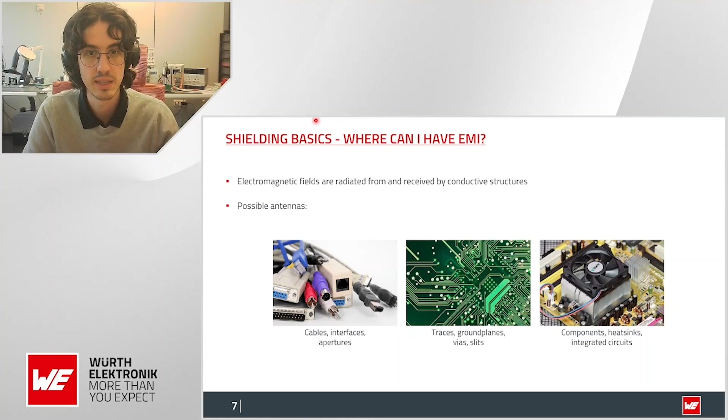Also, these electromagnetic fields are radiated by anything metallic that has a current going through it. That means anything can be an antenna, including cables, input-output interfaces, and apertures, for example from the frame and the cover of your application. Also in the PCB, we have traces and ground planes that can be good antennas that could provoke electromagnetic fields. And also some passive components, like, for example, a heatsink in this case.

We know that on the market there are several types of shielding materials, and all of them have different properties and are made in different ways. So the best way to compare them is with the shielding effectiveness, which is a quantitative property that gives you the value of how much the material is attenuating, or removing, the field in the environment.

This is a really simple measurement, because what is being measured is the environment without the shielding material, and then you just place the material in the middle, as you can see here. Then you subtract one value from the other, so you get the shielding effectiveness.

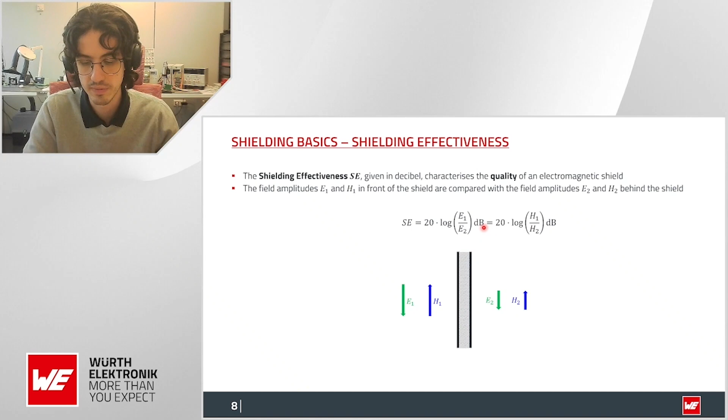Then some rules of thumb that will help you identify which type of shielding material you need to use: for example, if you want to shield your device from an electric field, then you need to use a low impedance material. In this case, it can be, for example, a copper tape or an aluminum tape, because what you want to have is a high conductivity material.

And if it is the other way around, that you want to shield your application from a magnetic field, in this case you need to use a high permeability material, for example a ferrite sheet. Another rule of thumb is that normally, if you want to attenuate a magnetic field, the thicker the material, the more it will attenuate, especially speaking about ferrite sheets.

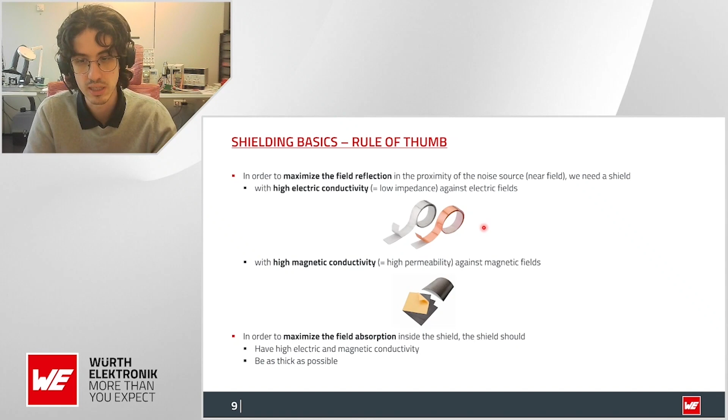And now jumping directly to some tips here that probably will be quite useful for you. For example, EMC gaskets: where can they be found, where can you use them, or where can you see them? In the end, EMC gaskets can be found everywhere. If you have an enclosure, then probably you're going to have a gasket there.

So as you can see here, for example, on this device with a heatsink and everything, we have an enclosure. As you can see here, we have the gap for the ventilator. Also, we have one for the input-output interfaces. Then we also have one here for the LCD screen or the touch screen. So in all of those places, a gasket must be used.

Also, some other applications can be when we have a cable and we want to have a good grounding connection to the enclosure. Then we can have a gasket that can be cut or customized to the shape of the connectors. And then we ensure that we have a good connection, a good grounding connection in this case.

And another really common application is with all the EMC chambers that you have probably already visited. If you check out the frames of the enclosure, you can see some metallic gaskets over them, just to ensure that the door of the EMC chamber is well connected to the frame, or to the chassis in this case.

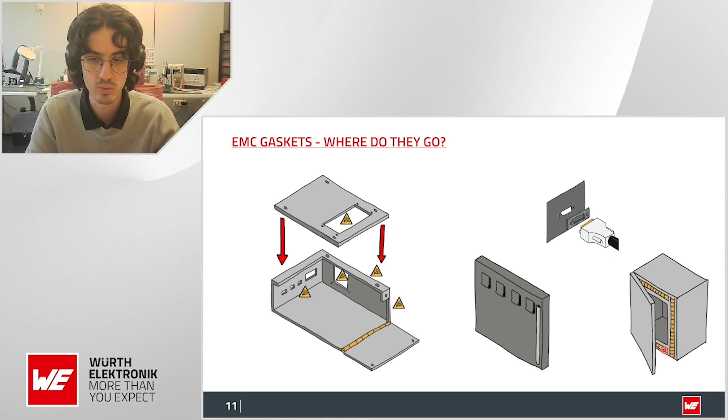Then about why gaskets are needed, that will probably be one of the questions you have in your mind now. In the end, gaskets are needed just to fill gaps. Because whenever we have our cover and our enclosure, even if we think that the surface is super smooth without any kind of discontinuity, or is super soft to the touch, if you take a microscope and zoom in, you will always find these kinds of discontinuities.

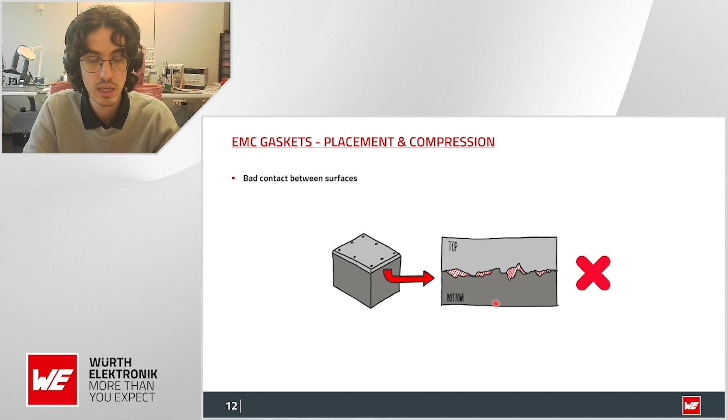And these discontinuities could provoke an electromagnetic field here, because in the end you will have a conductive surface here, another one here, and a current can go through it. And at the same time, the noise can go outside through it. So what you want to use in this case is an EMC gasket, mainly just to fill the gaps. And if you fill the gaps, then you are 100% sure that you are creating your perfect Faraday box, which is in the end the main purpose of your enclosure.

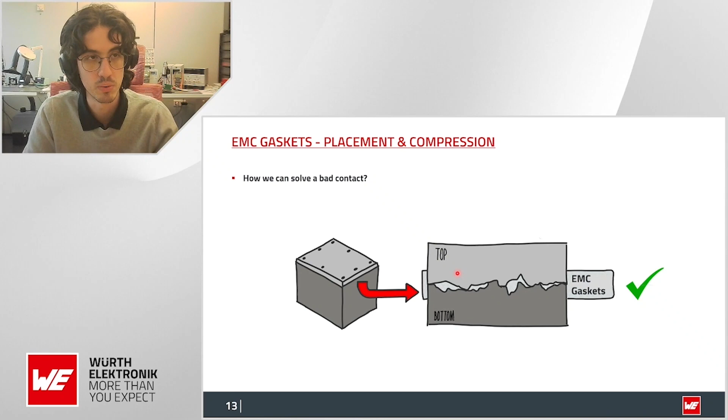Then, in order to use an EMC gasket correctly, there is actually a general rule of thumb for all mechanical shielding or grounding materials, which is that in order to achieve the best conductivity value, and at the same time not overstress the material from a mechanical point of view, the best thing is to compress the material around 20 or 30%. That's a general rule of thumb.

And what you are achieving in this case, for example, is the case of the conductive fabric over foam gaskets, which are normally produced with a non-conductive adhesive tape on the bottom. So if you compress them at 20%, you will achieve the best value of conductivity, and at the same time you will make the conductive fabric overlap the non-conductive adhesive, ensuring that you have a good connection between the top face and the bottom face.

Then another extra tip to place them correctly in your enclosure: the best way will be to create a groove along the inside surface, or the inside side, sorry. And the best thing will be to create a groove with a depth of around 80% of the total height of the gasket. So say, okay, I need to use a gasket that is 10 millimeters in height. Then in this case the groove is going to have a depth of 8 millimeters. So I'm 100% sure that the 20%, so about 2 millimeters, will be on the outside.

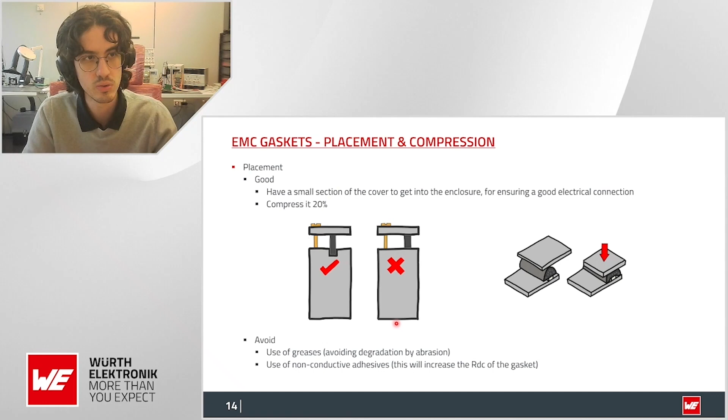And then also the groove is quite important, so the gasket doesn't slip out from it. So then you know that it is fixed in the same place. At the same time, another important tip is to not use any kind of grease or lubricant in this case, just to make the compression of the gasket not scrape the walls or not get stuck. Because then what you are provoking is that you are adding a liquid or something that is not controlled to the environment of the gasket, and that could provoke some corrosion.

Another important thing to have in our mindset when we are using EMC gaskets in our enclosure is material matching. I always like to think about it like finding the perfect partner. Because if you don't find a good match for your material, or for your couple, then you will have problems in the long run. Which, speaking about materials, will provoke oxidation layers all over the place.

So that means that, for example, if my frame is made of aluminum, then the best thing would be to choose a gasket made of aluminum. Or in the worst case scenario, choose something that is made of zinc, cadmium, steel, or magnesium. Because some common problems that mechanical designers or engineers face many times is that they make the chassis of aluminum because it is cheap, it is light, and it doesn't add too much value to the mix. And then they use conductive fabric gaskets, which are made of nickel copper wires.

So that means they are using aluminum and making contact with nickel, meaning that in 1 or 2 years, depending on the environmental conditions, they face oxidation layers over it. So that's a big issue and also a common one that can be solved just by using an aluminum gasket in this case.

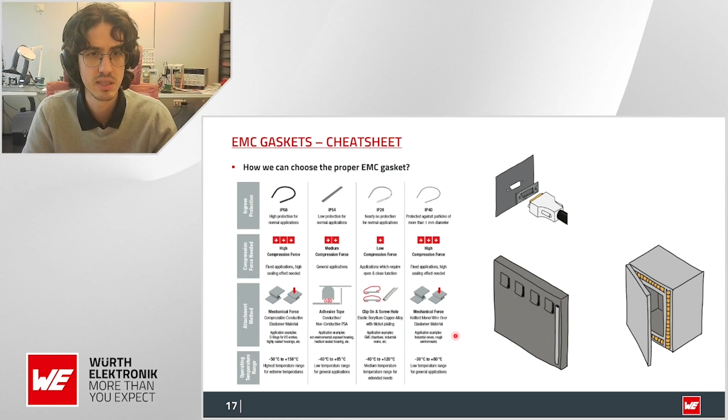And I know this can be a lot of information, and it can be a bit tricky to know when to use a specific gasket. So that's why we created a kind of cheat sheet, which can be used as a guideline or a checklist for choosing the correct gasket. Here you will find at the beginning the most important parameters that are normally checked: the ingress protection value, the temperature range, how you need to attach it to your enclosure, and also more or less how much compression force you need, if too much or too little.

So by using this table, for example, you can already start to discard options. It will be like doing a shopping list. Saying, okay, my application needs an IP54 or higher ingress protection value to avoid particles getting inside, like dust, water, or whatever. So then you can already discard this one and this one.

But then if your application requires working at 100 degrees because it is related to automotive, for example, then you know that the conductive fabric over foam gaskets, this one, is already out of the equation because it can only work up to 85 degrees. So that means the only good choice, let's say, will be this one.

This cheat sheet is already on our website, so feel free to use it and download it, and also to give us feedback about it, to evolve it.

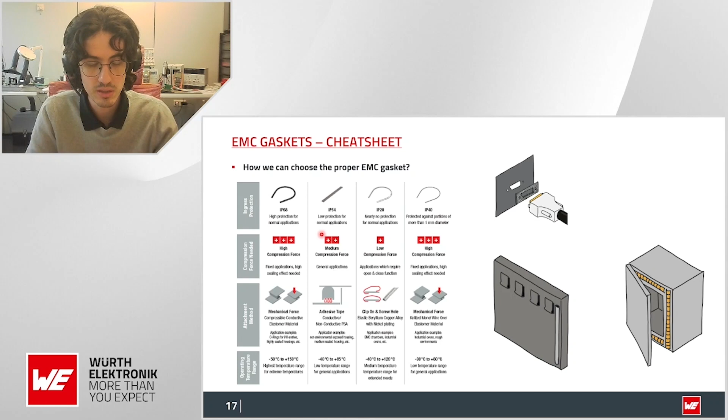The next product group that I'm going to talk about is the board level shielding product group. In board level shielding, these are the shielding products that are used on the PCB. Here, let's say we have two really big groups. The first one is for improving the shielding of your PCB or your application by using grounding or by improving your grounding connection. The other one is mostly about shielding specific areas of your PCB.

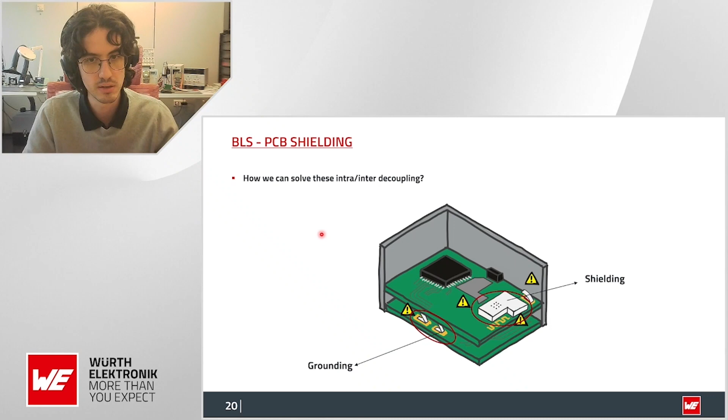As I was saying, for grounding, normally you will find contact springs or contact fingers. They have several names, but in the end it is an elastic piece of beryllium copper with some plating over it. And since a couple of years ago, you can also find SMT gaskets on the market. From the shielding point of view, the most popular solution for board level shielding is shielding cabinets, shielding cans, or in the end creating a small Faraday box, as I will explain later.

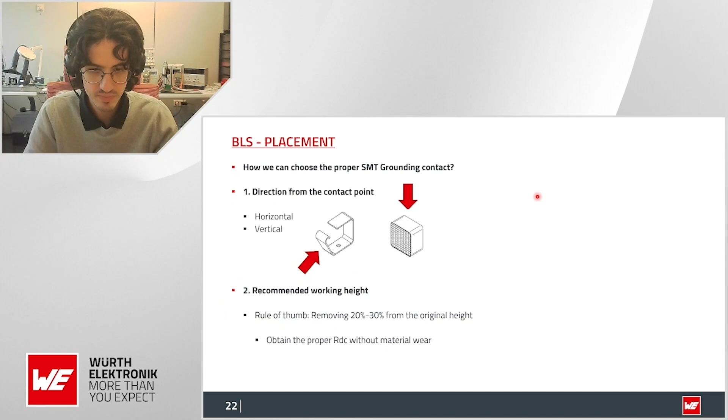The second most important thing you need to bear in mind is the recommended working height. As I commented before for the gaskets, the rule of thumb is that all the mechanical or elastic shielding components normally need to be compressed around 20 to 30%. That means that if a component is 10 millimeters in height, the working height won't be 10 millimeters. It will be something between 8 and 7 millimeters. So that's something you need to bear in mind: to think, okay, I need to use something a bit smaller, or to have this measurement in mind.

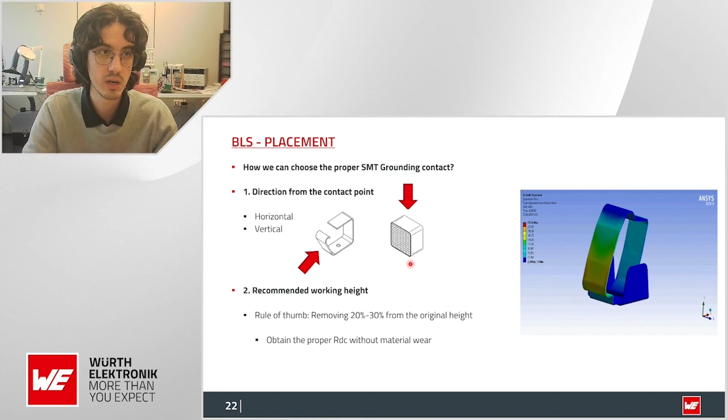At the same time, something that will directly affect the working height is the compression force. Depending on the material or the type of product you're using, you may have to use a contact finger or an SMT gasket. As a general rule, SMT gaskets normally require less force than contact fingers, maybe because of the foam material inside.

Like I was saying for the gaskets, something you also need to keep in mind for selecting the correct product is the materials, because you will have two different materials making contact. For example, you can make contact between your PCB and your enclosure. Let's say again that our enclosure is made of aluminum, so the best thing would be to use some tin material or some nickel material. For example, let's say we want to make contact between our copper pad and a contact finger. In this case, using a contact finger made of nickel material can help with the corrosion that will happen on the pad, so this kind of plating will help.

But we know that nickel is a bit tricky to solder. So what we have been doing with our contact fingers made of nickel is to add a layer of tin on the bottom, so it is also easy to solder. But anyway, think about the materials when you're going to choose your product, because most of these products can be customized; the plating can be changed, and also the shape. So it's something that is workable.

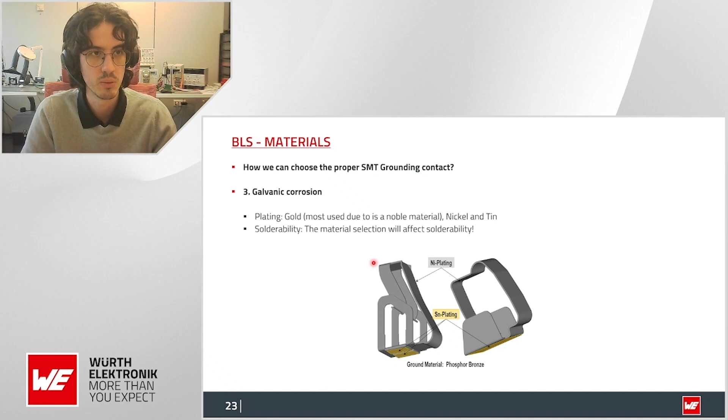Then speaking about the second product group, that is the shielding product group, let's say for board level shielding. At the end, when you're having a shielding cabinet, what you want to create is a small Faraday box inside your PCB to, let's say, improve one specific area. So here the shielding cabinets can be used from two different points of view.

For example, you can use it in order to shield or encapsulate a noisy area. Let's say that this IC here is radiating or creating a lot of EMI. In this case, if you use a shielding cabinet over it, you can keep all the noise inside. But they can also be used the other way around, meaning I have this IC that is really sensitive to external noise, so you can shield it and protect it from the outside. This is what I meant that they can be used from two different points of view.

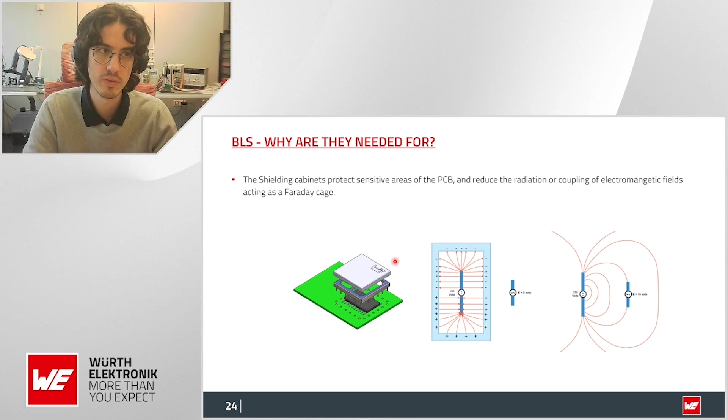Then speaking about cabinets, currently in the market there are two big groups. One is the most traditional and standard solutions, which are the ones here on the left. We like to name them traditional or standard because of how we produce them: first we cut the metal sheet, and then we bend it and push it until giving the shape that we want.

That means that on the corners, for example, we have some tiny apertures that can be a door for the noise inside to go to the outside, or the noise from the outside to go to the inside, meaning that these cabinets are mainly fitted for low frequency applications. By low frequency I mainly mean from 5 gigahertz down, so from 5 gigahertz to 1 gigahertz or even lower. This is the application that really fits this kind of cabinet.

And then for the new technologies that are coming now, like 5G, IoT, or even higher frequencies, there is also a new type of cabinet, which is totally seamless because of the way it is produced, and it totally fits high frequency applications, mainly because there is no gap or tiny aperture or hole where the noise can go to the outside or into the inside. So everything is kept inside.

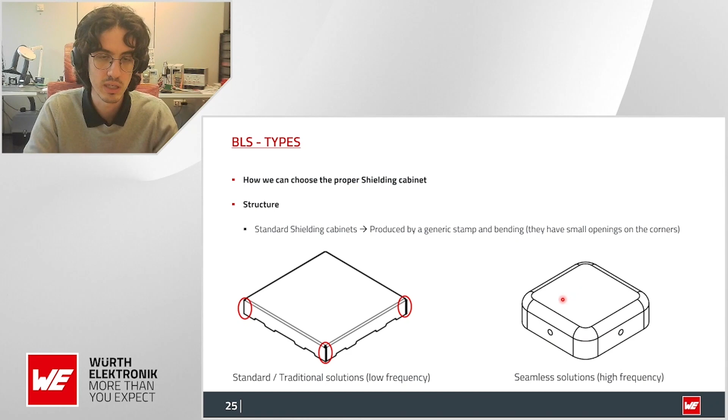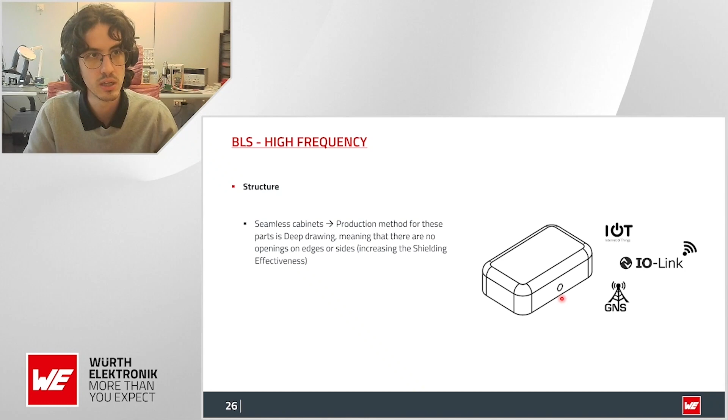As I commented, the seamless cabinet is the best one for 5G or the new high frequency applications, mainly because of how they are produced. They are produced by deep drawing technology, which means we get the mold of the cabinet and then push the material really slowly down to the bottom of the tooling, so then we have the desired shape.

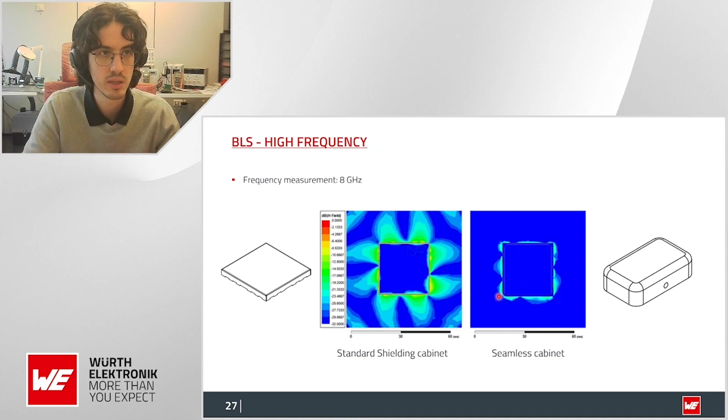Then another common problem here is that most of the time shielding cabinets are a metallic component, and when they are exposed to salty or humid environments, they can get corrosion. So in this case, once the cabinet is soldered and you have the 360-degree high conductivity connection to it, so you have conductive material all around the area, the corrosion or oxidation layer won't affect the shielding performance of the product, because you already have the high conductivity seal around the area.

It will only cause problems when the corrosion actually eats the material and you have gaps in it. But you would need to wait thousands of years for that. But anyway, as designers, we understand that having some corrosion on your PCB or end application doesn't look good, especially for the end customer, because you're paying money for it. So you want something that is shiny and looks really nice.

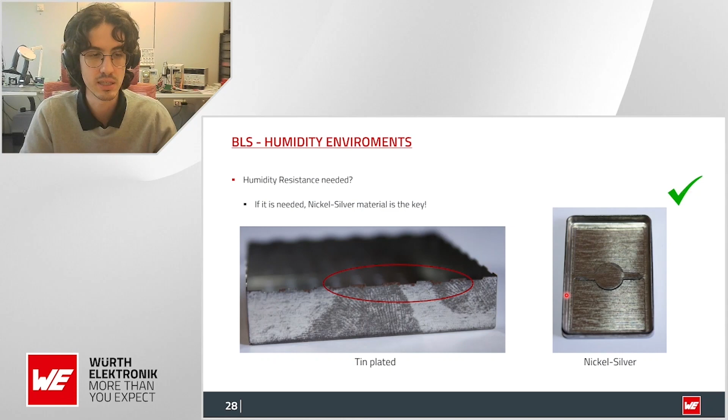So for those kinds of situations, there is the alternative of a shielding cabinet made of nickel silver, where the shielding performance is almost one-to-one the same. And once it faces a humid or salty environment, it remains the same. So it has a higher degree of resistance against salty or humid environments.

Another important thing, I'm asking you from a designer point of view: bear in mind that if you plan to use a shielding cabinet from the beginning and on your PCB you already include the footprint or reserve the area for the cabinet, you will save a lot of cost in the future.

Because many times we face situations where the customer, or in this case you, the designer, are already in the EMC lab. And once you are there, you realize that you need to use a cabinet. And in order not to rework the whole PCB because you're already in mass production, you ask to produce a customized application with specific measurements for a shielding cabinet.

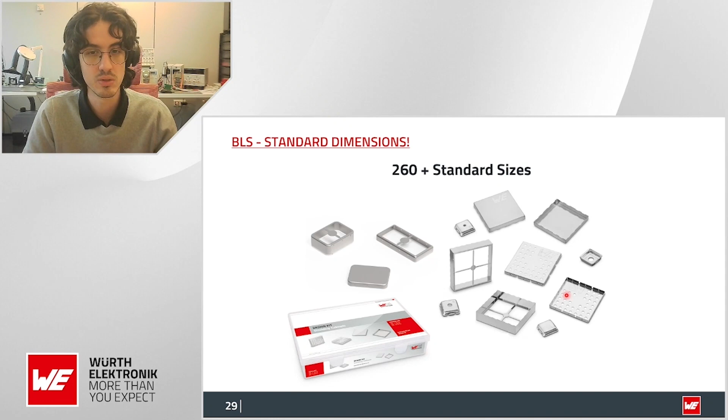Cost-wise, you will save a lot of money, a lot of headaches, and a lot of time just by including it from the beginning and using one of the standard dimensions rather than requesting a customized solution at the end, mainly a matter of time and cost. In our case, we already have more than 260 different dimensions. So next time you use it, I recommend you double check them and try to use one of our standard dimensions instead of a customized solution.

And last but not least, we know that many times you need a specific solution because the shape of the PCB is out of the standard or you need to cover one specific area, and asking for prototype samples can be a bit tricky or have extra costs that the accounting department is not a big fan of.

So in those cases, what we have available is the shielding do-it-yourself solution, which is a piece of nickel silver material that you can bend and cut, and it will be like a kind of Lego so you can create your own cabinet. You can solder it to your PCB, or you can solder shielding cabinet clips to the PCB and then just attach the cabinet to your PCB.

And after that, you can just try it. So it is reworkable or removable. You can just place it and then unplug it.

And now the last product group that we are going to speak about is the magnetic absorbers. Magnetic absorbers are normally used to clean the noise from the PCB traces, like when you have some signal or data lines, and then you have some crosstalk or some resonances in the line, and you can use them to filter them.

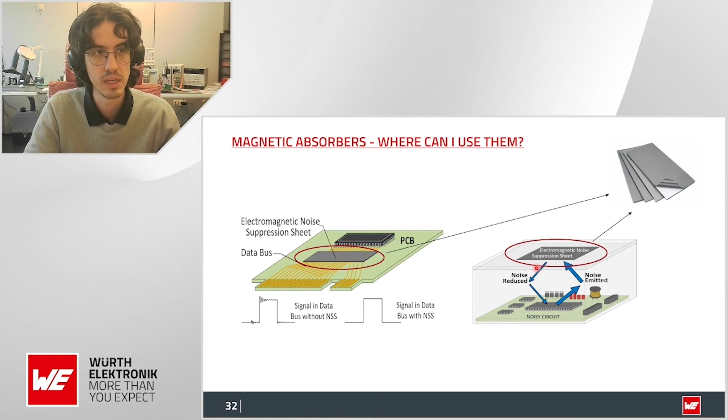When on the PCB you don't have enough space to use more passive components to clean the trace of the signal. Another application is just to eat or remove the noise that you could have in the environment, by attaching the absorber sheet to the enclosure, for example, and then it will act like a kind of sponge that slowly absorbs the noise from the environment.

Then, last but not least, what you can find on the market. There are two different types of magnetic absorbers. The first one is the flexible absorber sheets, or the acronym can be found as FAS. This one is a mix of ferrite powder with some silicone particles in it.

That gives the FAS, or the absorber sheet, some magnetic properties, and at the same time it gives it flexibility. So you can bend them and also just stick them in other places. So at the end, it will be kind of like a sticker.

The other kind of product that you can find on the market is the flexible sintered ferrite sheets, which are a sandwich of different layers of magnetic powder. Everything is compressed and smashed like a really big sandwich.

The pros and cons of this kind of ferrite sheet are that it has a higher permeability than the flexible absorber sheets, because you have ferrite layers all over the place. But at the same time, the con is that it is not really flexible, meaning that just by bending them a bit, you will feel the ferrite layers cracking, meaning the magnetic properties will change.

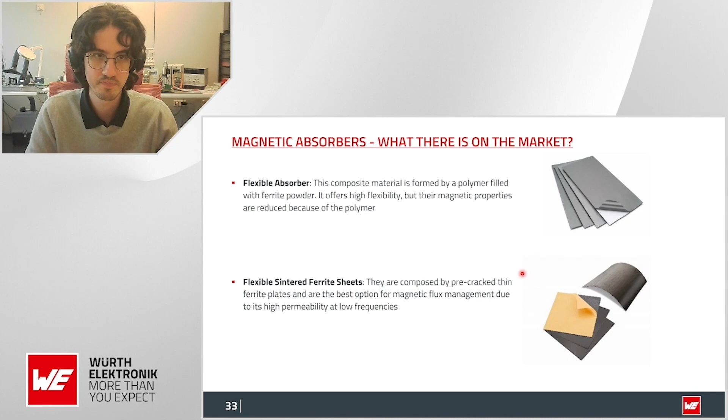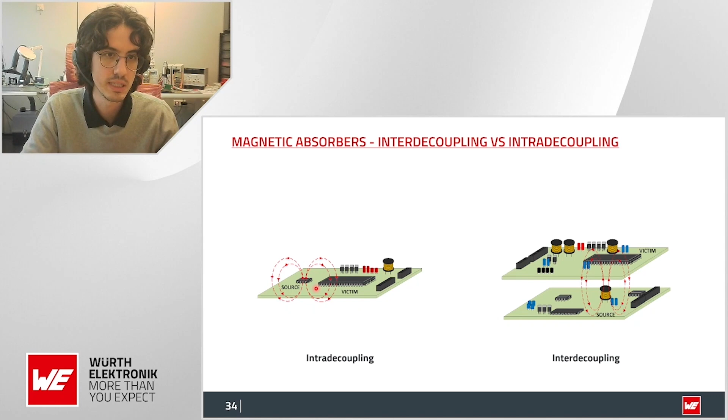Inter-decoupling problems are the ones that affect the neighbor up or down the PCB. When you have, for example, a rack of several PCBs, like a server, the most common problem will be inter-decoupling. One PCB, or one component of one PCB, will affect the other one. So by sticking a layer of absorber sheet here, or over the IC or just next to it, you will be able to solve this issue.

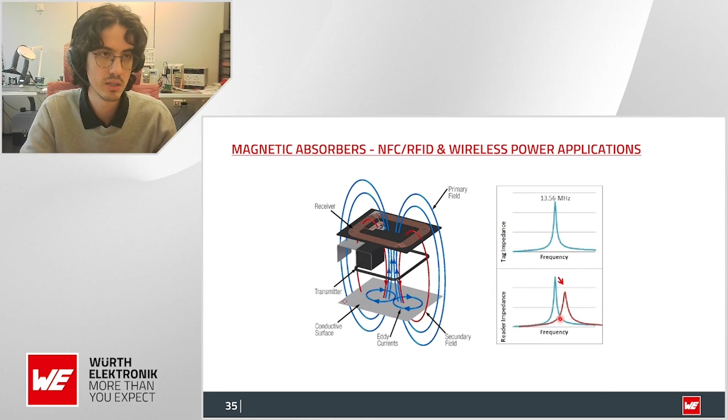Magnetic absorbers are also used to optimize systems because of the properties that ferrite has. For applications like NFC, RFID, or wireless power, the ferrite can be used to improve the communications and avoid the problems that eddy currents can provoke. I'm not going to go too much into the physics because I'm running a bit out of time. The eddy currents are shifting the waves from the wireless power system or from the NFC.

By using a ferrite sheet here in the middle, you are refocusing the signal to the desired way. So here, for example, it can be a nice application for the ferrite sheets.

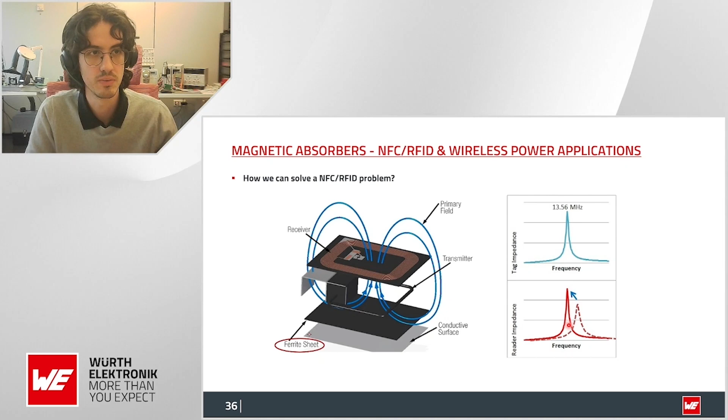I have been speaking all the time about absorption and reflecting. The summary is that the best way to know which magnetic absorber you need for every specific application is to check the permeability, which is a material property. That means the thickness doesn't matter here. The permeability is normally given in two different factors.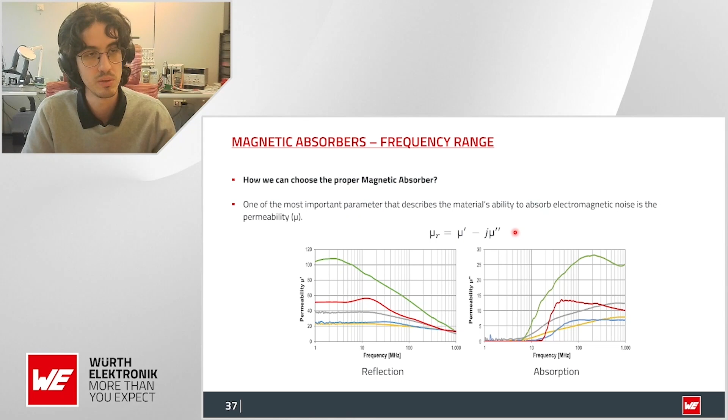So by comparing the values for permeability, you will be able to more or less have an idea of which type of absorber you need, if it is a FSFS or an FAS, so a flexible absorber or a sintered ferrite. And the best way to know which one you have to use will be to go to your sales colleague or person of contact from Würth, ask for many samples, and just try it in your system. Because at the end, there are several factors that will affect the performance. So the best way will be just to ask for samples and to try it.

And as a bonus track, recently there are many applications, because of new requirements, especially dimension-wise, that require shielding of the magnetic field or electric field and at the same time some thermal interface material in the middle. That's why there are magnetic absorbers with ferrite powder and silicone in them, to give them some flexibility. And at the same time, they have some ceramic material embedded into the mixture, allowing them to transfer some heat. So for example, in our portfolio, you will be able to find the FAS thermal, or thermally conductive.

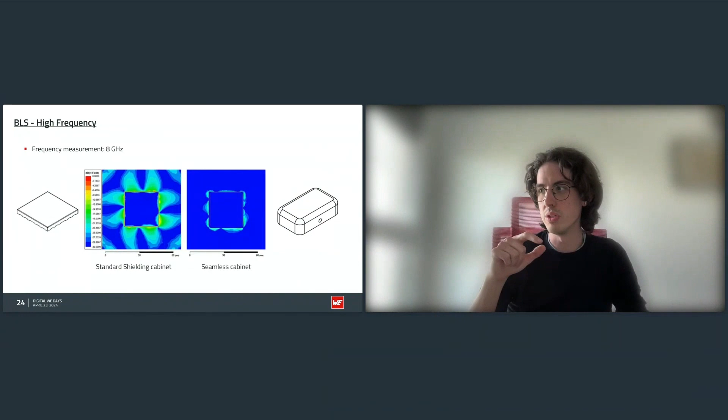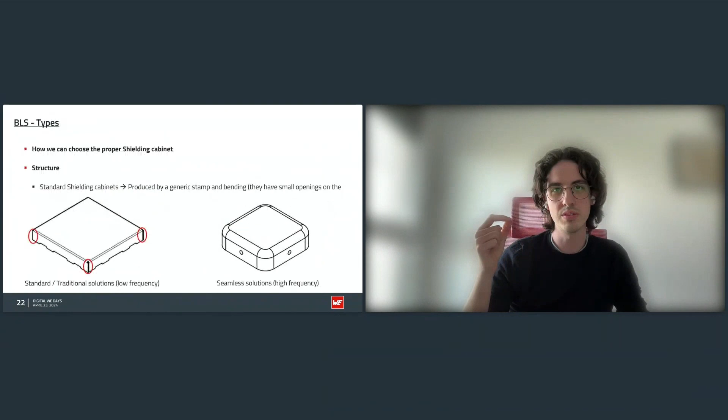Thank you. Next question. It's a question about slide 25. The question was low frequency range and high frequency range: what is the low frequency range and what is the high frequency range? Yeah. I think it is the previous slide to the one we are currently showing. No, it has to be a bit more. It has to be slide 25, where we saw the standard solution versus the seamless solution. One more? Yeah, exactly that one.

So the main purpose of when to use one or the other is that the standard solution, the one for low frequency, which is on your left, is mainly for applications that require shielding between, let's say, a couple of kilohertz or a couple of megahertz until more or less 5 gigahertz. From 5 gigahertz and above, we recommend using the seamless solution.

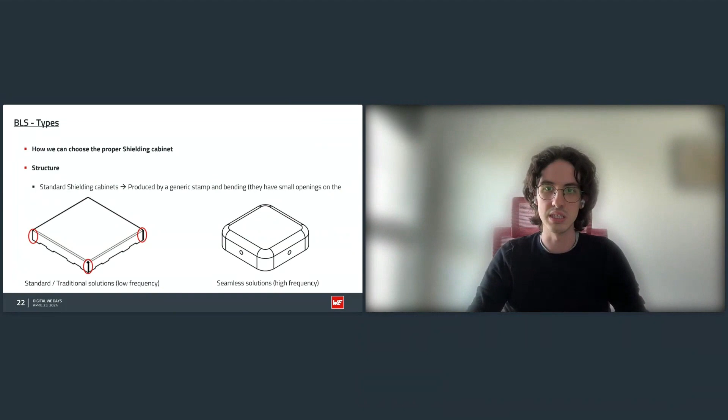Thank you. Then next question. It's also a question for page 27. Okay. Which simulation tool was used for the simulation?

Yeah, so in our case, we made the simulations with ANSYS because all our components are already implemented in the material library from ANSYS. But when I was checking the chat before, they also offered some other tools, like in this case CST. But in this case, our simulation was done by ANSYS.

Okay, thank you. Then next question. How can I measure and guarantee the shielding effectiveness? Yeah. So at the end, the shielding effectiveness can be measured in several ways. For example, if you make a quick research on IEEE Xplore, you will find thousands of papers about how to measure it. The thing is that whatever you see on the datasheet saying you will have 5 dBs of shielding effectiveness, those 5 dBs are based on the standard.